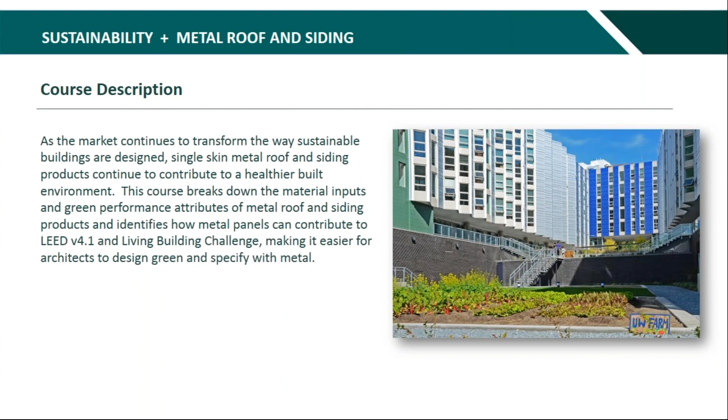So let's get started. The purpose of this course is to make life easier for architects to design green with metal roof and siding products. At the end of this course, you will have learned what makes metal panels green and how they contribute to green building certification programs.

We have 4 learning objectives. The first is material inputs and green performance attributes of metal roof and siding products. The second is understanding how metal products can contribute to LEED v4.1 for BDC projects. The third is understanding why and how transparency documents are valued under LEED 4.1. And the last is understanding how metal roof and siding products can contribute to the Living Building Challenge program.

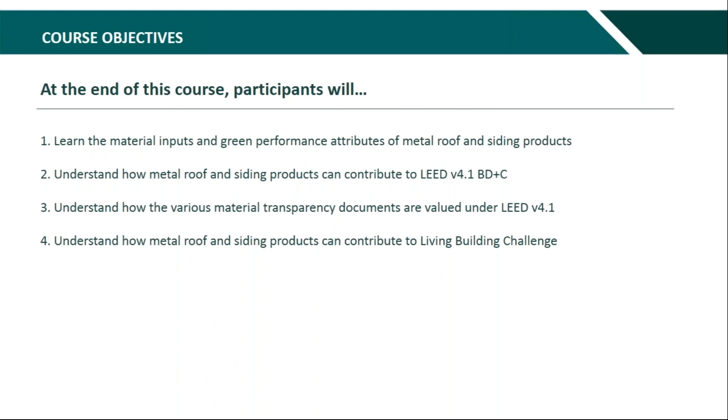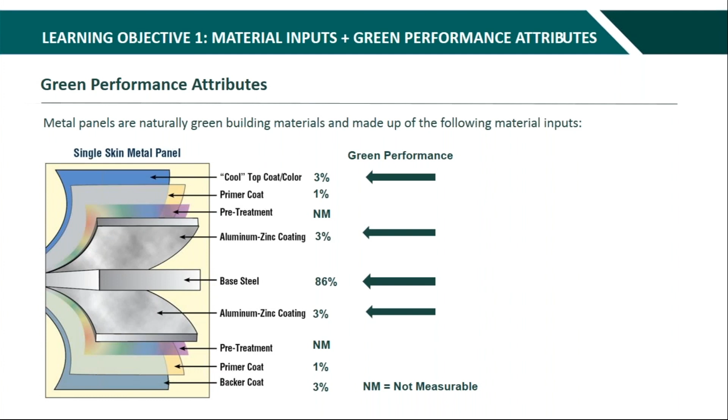Now, of all these materials, 3 ingredients deliver the green performance attributes metal panels are known for: the base steel, the aluminum zinc coating, and the cool top coat or color. Combined, these 3 materials represent about 95% of the total material used for metal panels, and those are the 3 materials I'm going to elaborate on.

So let's talk about the base steel and the aluminum zinc coating. What makes base steel green is that steel material has a long lifespan. It is 100% recyclable at the end of its life use, and it can be produced primarily by way of recycled steel. I'll elaborate more on that shortly.

The aluminum zinc coating offers outstanding corrosion protection, which helps contribute to the lifespan of metal panels. The Bethlehem International Engineering Corp did a real-world study a few years ago and found that the corrosion protection of aluminum zinc coating can span from up to 50 to 60 years. So when you combine the durability and longevity of steel material plus the corrosion protection of the aluminum zinc coating, those contribute to metal panels offering a lifespan of 40 to 70 years, and being 100% recyclable at the end of its life use.

This other benefit isn't attributed to the material, but metal panels are made to order, which minimizes waste on the job site. I'm mentioning that because that is a great green benefit.

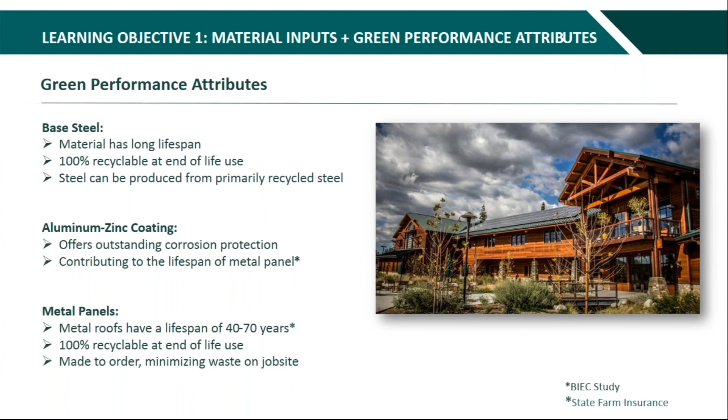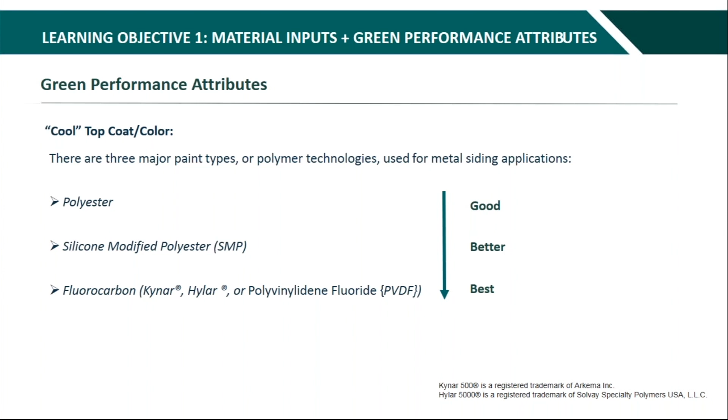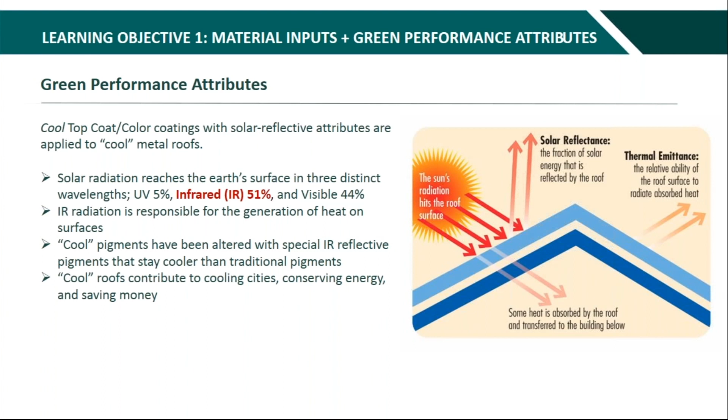Now, the paint systems that we use for cool metal roofs are also used for metal wall panels, which allows metal walls to offer the same solar reflectance and emittance performance as cool metal roofs. There has been recent research and discussion around creating a cool wall rating system, so I thought I would touch on that topic.

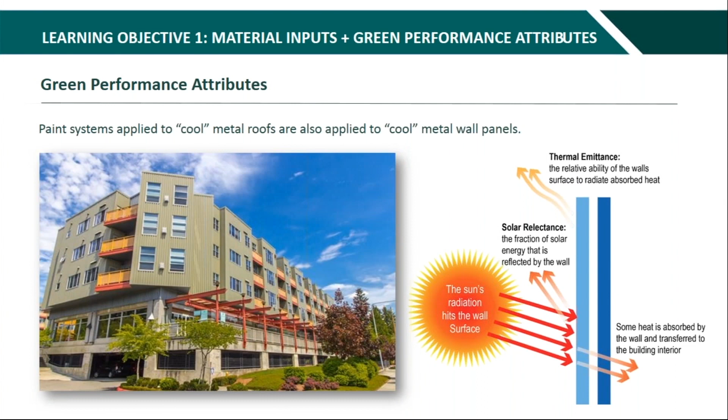The key takeaways from that research were that cool walls save energy, money, and carbon dioxide in warm climates. They help mitigate urban heat islands, and they tend to stay clean, and are available today, often at no extra cost.

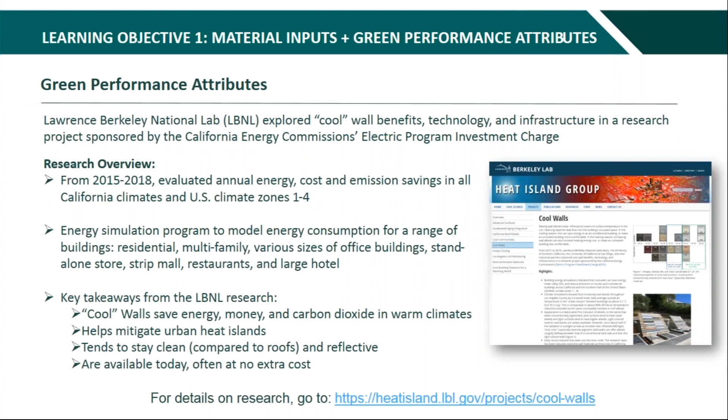The LBNL is developing cool wall measures in codes and standards and green building programs. They're working on establishing a cool wall product rating system that may be modeled on or expand on existing programs. We also know that the CRRC is proposing to create a rating program for exterior wall products, similar to their roofing program. So that's definitely an area that we are going to be monitoring.

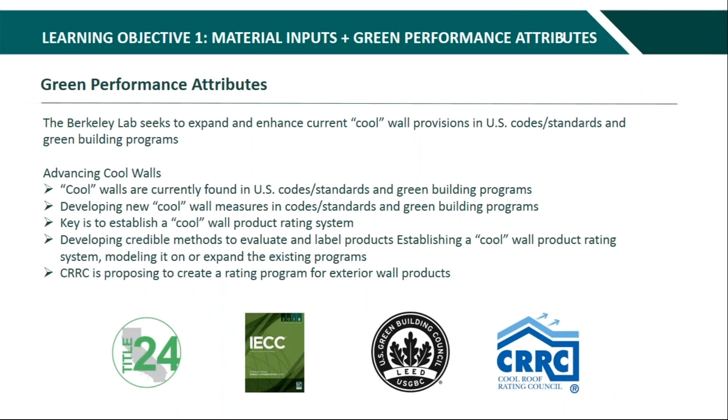So let's recap the key learnings for Objective 1. First, there are three main material inputs that deliver the green performance for metal panels: the base steel, the aluminum zinc coating, and the cool top coat or color.

We know it's the paint system used for metal panels that has cool pigments contributing to cool metal roofs. The paint systems used for cool metal roofs are also used for cool metal walls. We know that LBNL research has confirmed cool metal walls contribute to saving energy, reducing utility bills, and carbon dioxide in warm climates.

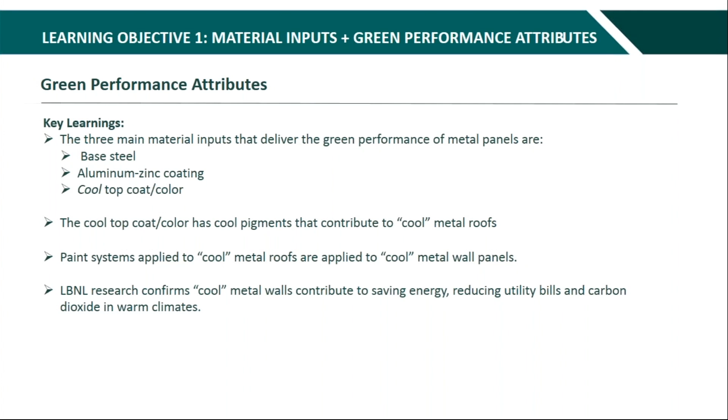The first poll question is: what material inputs contribute to metal roof and siding green performance attributes? We only have a little bit of time here because we got a lot of material and we want to keep pushing forward, so answer quickly. It looks like about a quarter of you have voted so far. Round up your voting now, and then we'll let Marie get to the final answer here. I'm closing it, last clicks.

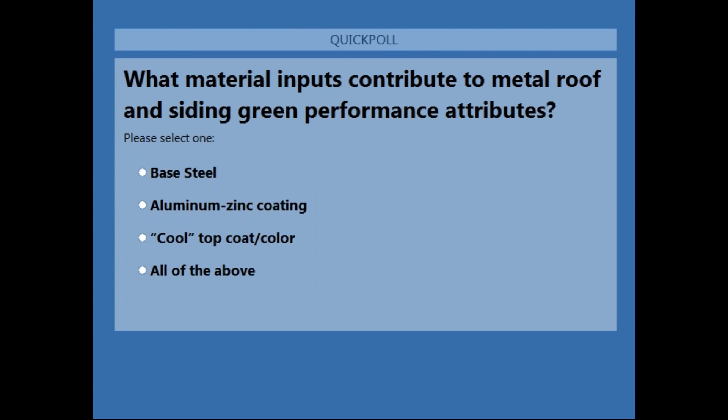Okay Marie, let us know how the audience did. I can tell you after you give the answer. So the spotlight question: what material inputs contribute to metal roof and siding green performance attributes? And the answer is all of the above. So Paul, how did the audience do? 77% of the audience got all of the above, 10% for cool top coat, 10% for base steel, and 3% for the aluminum zinc coating.

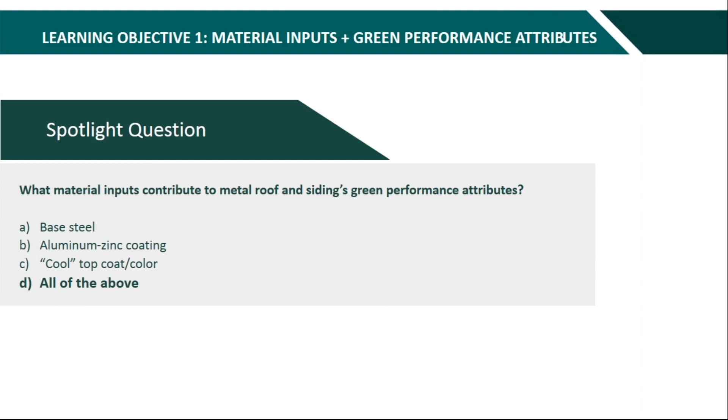Okay, excellent. So let's move on to the second learning objective, which focuses on how metal roof and siding products contribute to LEED 4.1 for B, D, and C projects. My focus is on USGBC's LEED rating system because it is the most recognized rating system, and I thought providing a LEED 4.1 assessment would be a good foundation for understanding how metal panels can contribute to other green building certification programs. There are a few of those other programs, but I thought this assessment would be a great foundation.

So here is a high-level snapshot of where metal panels can contribute points. I will cover each of these categories and point out the changes between LEED V4 and 4.1. But I want to make it clear that the actual point contribution would vary because it would depend on the type of project and design for the project.

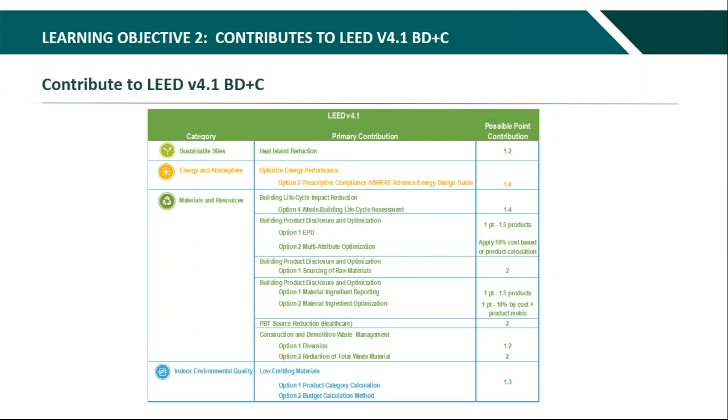So let's get started with the first category, sustainable sites, specifically heat island reduction. The intent of this credit is to minimize the effects on microclimates by reducing heat islands. We learned in the first learning objective that it's the paint systems that contribute to metal roofs contributing as a cool roof. Every color will be designated an SRI value, and if that color meets the minimum SRI value established in LEED, a point can be applied. What's important to note is that the CRRC provides 3-year SRI values based on generalized color families, and their approach is conservative and does not reflect the actual performance of each color.

The coating suppliers do not provide weather testing, so providing an actual 3-year aged SRI value for each color is not available. Coating suppliers are using CRRC's default values because it's an easier path. I'm sharing this with you because we received requests for 3-year aged SRI values, and we will provide the CRRC SRI values, but we also supply the initial SRI values because we feel that the initial SRI values reflect the true performance for each color.

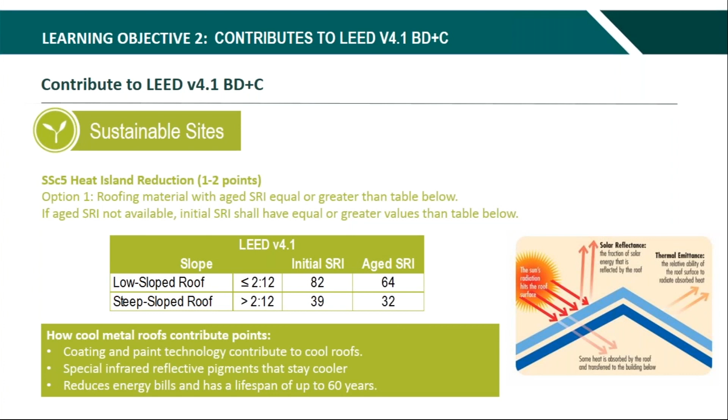This next category is energy and atmosphere, specifically optimized energy performance, and its option 2 is where metal panels can contribute points. The intent of this category is to increase levels of energy performance and reduce environmental and economic harm associated with excess energy use. Cool metal panels that meet the minimum SRI values can contribute or be included in energy simulation models, and cool metal roofs improve energy performance, but the percentage savings are based on several other factors, including the climate zone, the building geometry, and the HVAC system type.

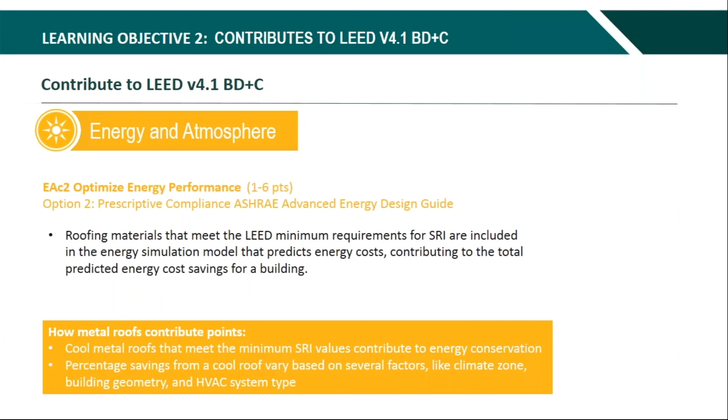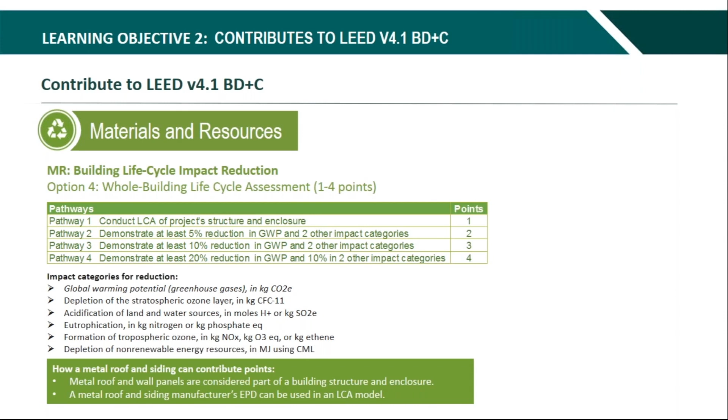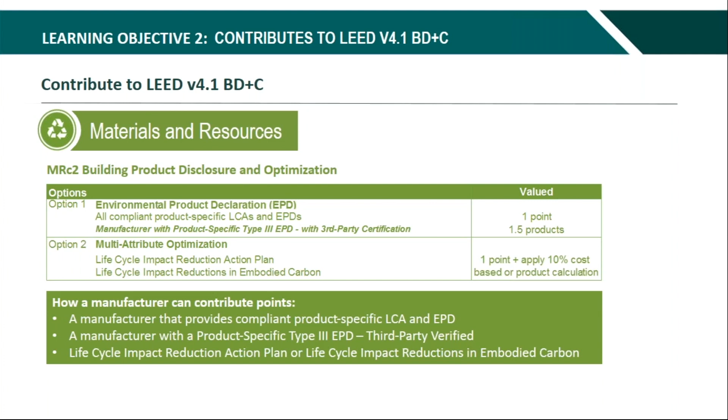Under V4, option 2 was leadership extraction practices. That is now option 1 under LEED 4.1, renamed to responsible sourcing of raw materials. I have that displayed in the table on this slide. But for metal panels, they fall under the recycled content option. Under LEED, there is a default recycled content for steel products where no recycled content information is available, and it can be assumed that the recycled content is 25%.

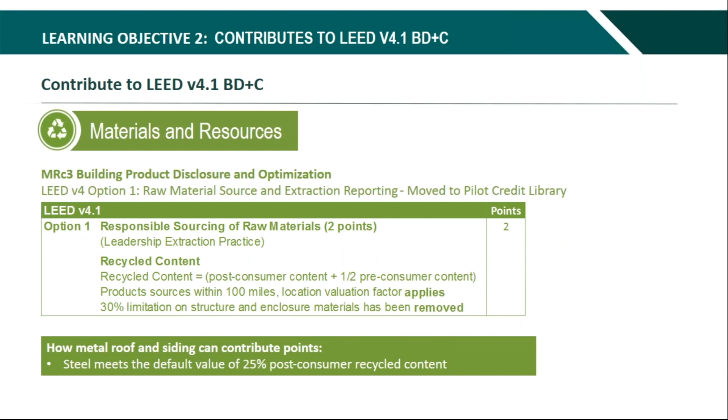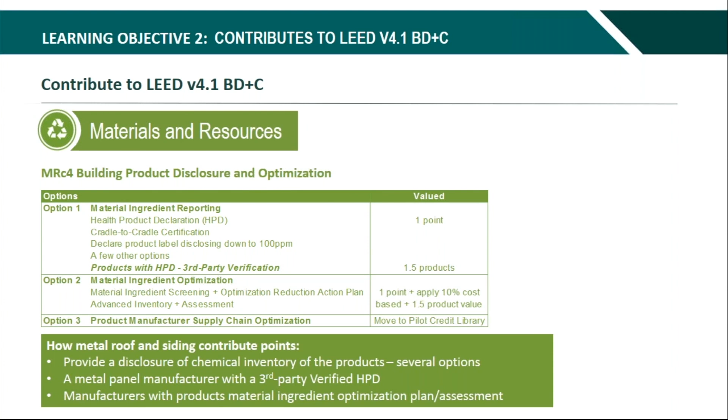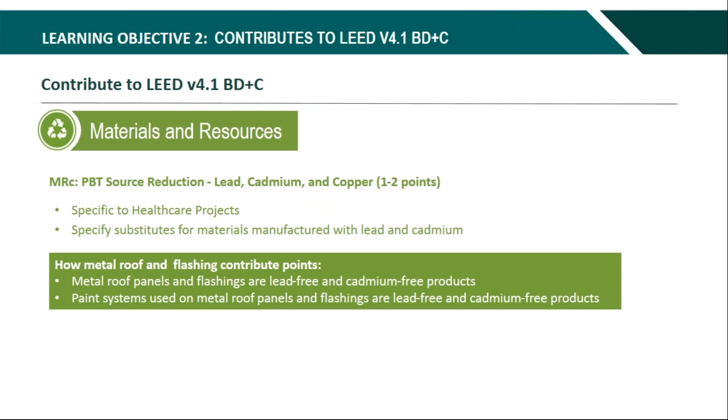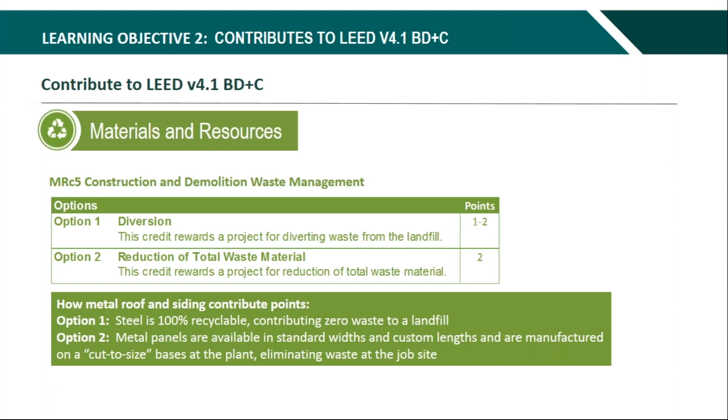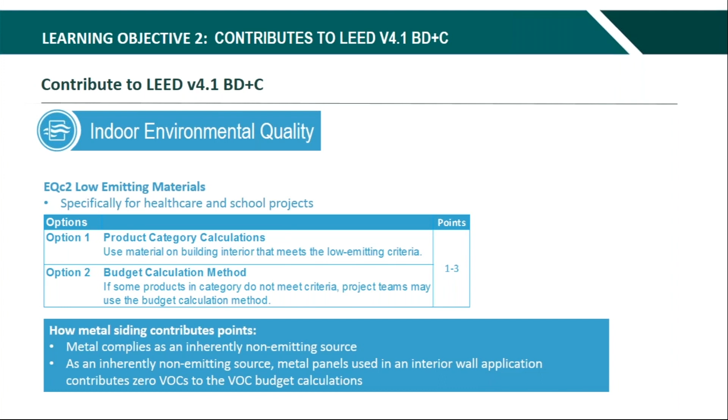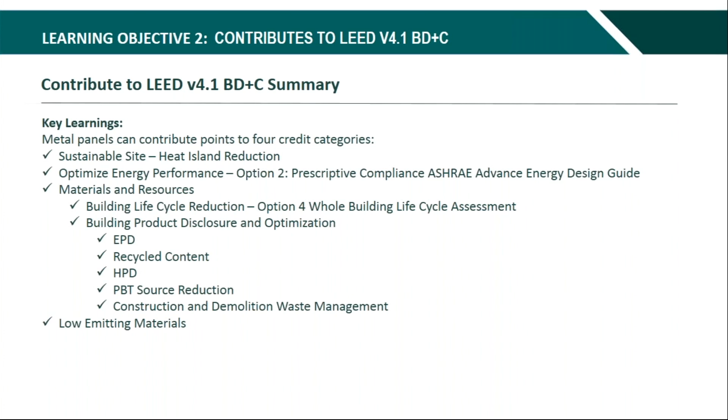And the answer would be C, materials and resources.

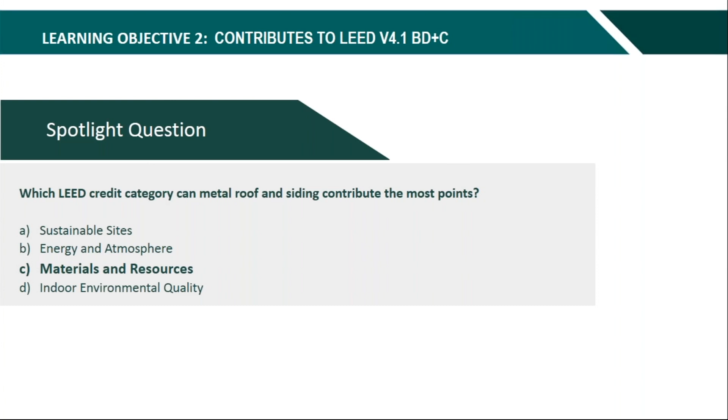Okay, perfect. So the third learning objective is around why and how transparency documents are valued. The two main transparency documents are the EPDs and the material ingredient reporting. The EPDs, of course, are derived from the LCAs, which determine the environmental impact of the manufacturing process from cradle to gate. The material ingredient reporting is done by way of HPD and some other disclosures, and of course the Declare label, and those disclose all the ingredients and known hazards in a product.

One thing I wanted to share quickly: in November I attended the USGBC Greenbuild Conference, and they shared a really important piece of information I wanted to share with you all, and that was the number of EPDs in North America has grown from 300 in 2014 to 1,500 as of November 2018. That's a huge increase. I was trying to look for similar data regarding HPDs but wasn't able to find that definitive data. But what I will say is that, if the growth of EPDs is any indication, building product manufacturers are listening to the design community.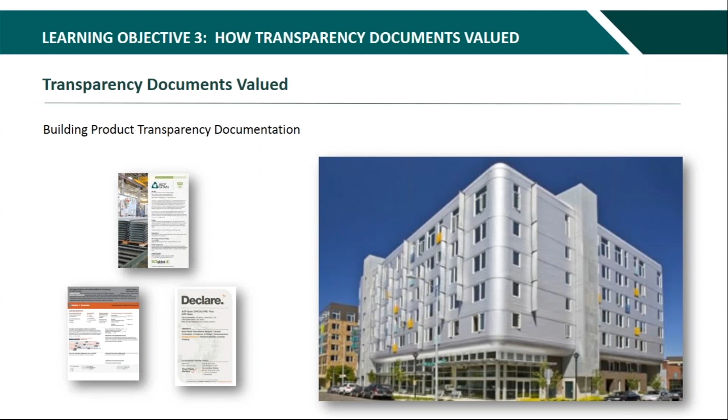So what I'm going to share with you now is regarding these transparency documents, specifically around metal panel products. Here's the EPDs, and I tried to make this simple: on the top part is version 4, on the bottom part is version 4.1. Let's start with version 4. Option 1, there were 3 pathways to contribute a point, and the product-specific Type 3 EPD could contribute the highest value, as you can see from the table on top. In option 2, there was a multi-attribute optimization, which was really intended to establish an industry average threshold for the impact areas.

Well, the change in V4.1 was meant to really simplify the selection of products with LCA data and increase the ability to select optimized products. So under option 1, if a manufacturer provides a compliant product-specific LCA EPD, they can contribute a point. Simple, right? There's not those 3 variations like there were under V4.

Now it's simple, 1 point. Now, if a manufacturer provides a product-specific Type 3 EPD with third-party verification and external critical review, they can contribute a point, and the product can be valued at 1.5 products.

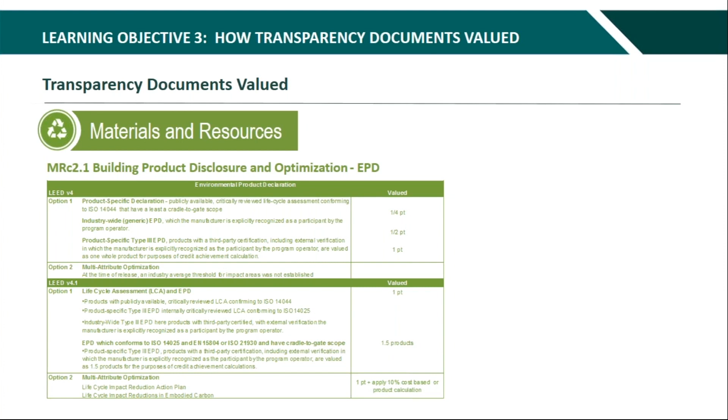So now in the case of metal product manufacturers, they would need to provide 2 different EPDs. Let me show you how this works. So depending on your project needs, on how a project is funded, determines which supply chain a metal product manufacturer would use to produce metal roof and siding products for your project.

And in general, standard steel materials used to manufacture metal panels that are located on the West Coast, so manufacturers on the West Coast, will be supplied by way of a basic oxygen furnace steel mill, and a metal product manufacturer would need to supply an EPD for that specific supply chain.

Now, if a project requires metal products with a higher recycled content, the steel material would come from an electric arc furnace steel mill, and an EPD would need to be provided by way of that supply chain. So that's an important distinction.

And so, of course, knowing that ahead of time at the beginning of a project is critical for that to be articulated to the metal product manufacturer, because they typically follow the standard steel supply chain, the BOF steel mill supply chain. So it's really critical to communicate that on the front end of a project.

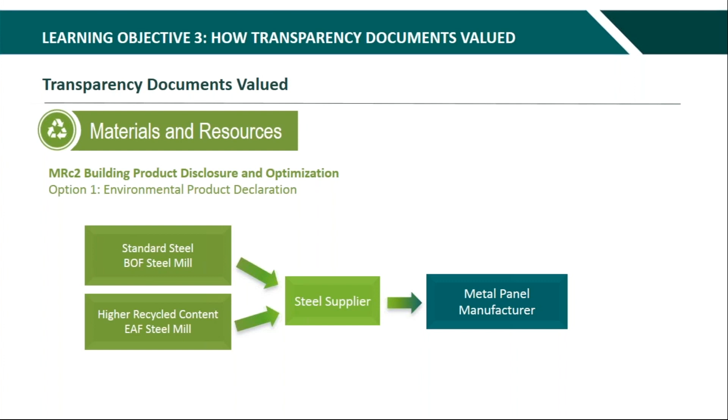So the second transparency disclosure that I mentioned is the material ingredient reporting. The changes to the material ingredient credit under LEED 4.1 were intended to reduce barriers for achievement while maintaining the overall approach to the material ingredient credit.

So as you can see from the table, LEED V4 option 1, there were several pathways to contribute a point. And then in option 2, there were several pathways to demonstrate material ingredient optimization. And in option 3, it was about supply chain optimization.

The changes from V4 to 4.1: in option 1, the pathways remain the same, plus they've added a third-party verification reward worth 1.5 products. So that is new. Option 2 was changed and rewards manufacturers who can demonstrate leadership for material ingredient screening, assessment, and optimization.

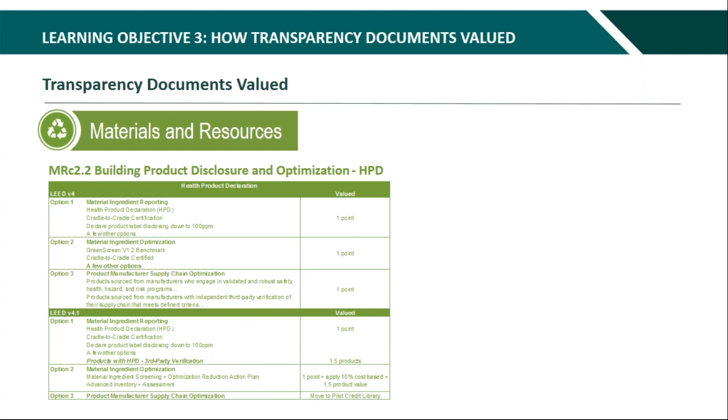And so 1 point can be contributed, applying a 10% of cost threshold and a 1.5 product value. And option 3 was moved to the pilot credit library. So I hope that shows it simple and visual. I'm a visual person, so I like to show that visually to simplify it.

Now, for a metal panel or metal product manufacturer, they would have to provide 2 different HPDs depending on the design needs of a project.

So a metal product manufacturer would need to provide a disclosure of its product in a painted offer, and the Residence Inn project is an example of that, and a disclosure for its product in an aluminum zinc coating with a clear top coating, and that would be the school project that I had shown on this slide.

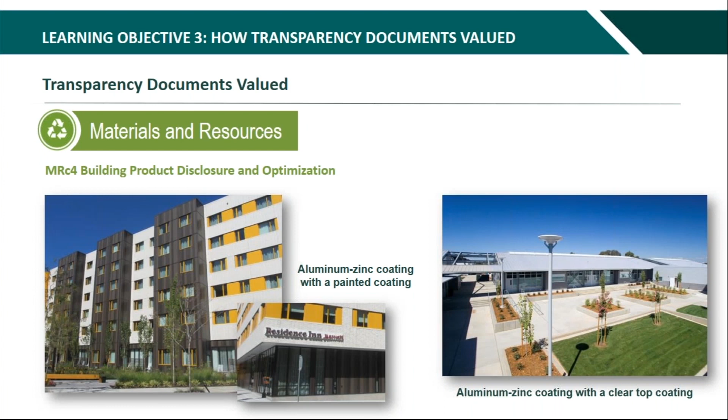As you can see, each coating, the different coatings, really support the different design aesthetics that an architect is trying to achieve. So that's an important distinction. So 2 different HPDs would need to be required.

Now, the third-party verified transparency disclosures remain an emphasis under LEED 4.1 and can contribute more to a project. Third-party verification offers many benefits, and I've included some of the benefits here, but I think the one that really stands out to me, I think they're all important, is that it provides assurance of compliance with standards. That to me is really important.

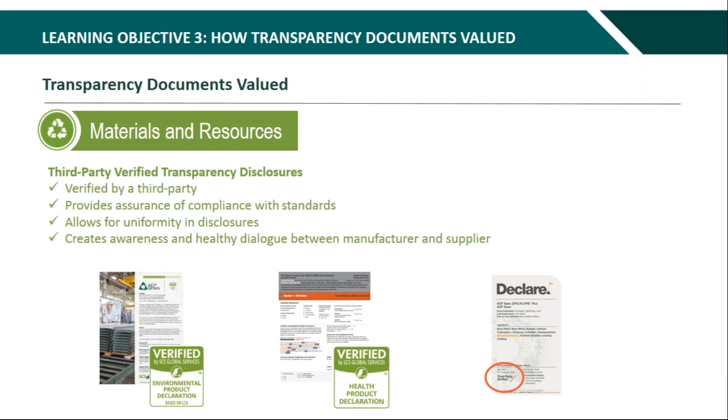But with that said, let's move on to the key learnings for Objective 4.

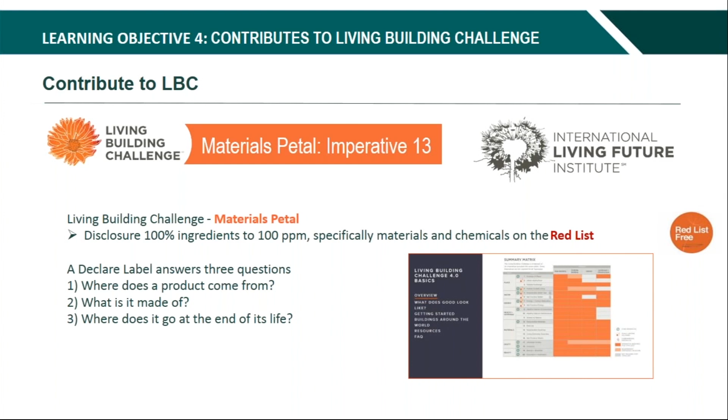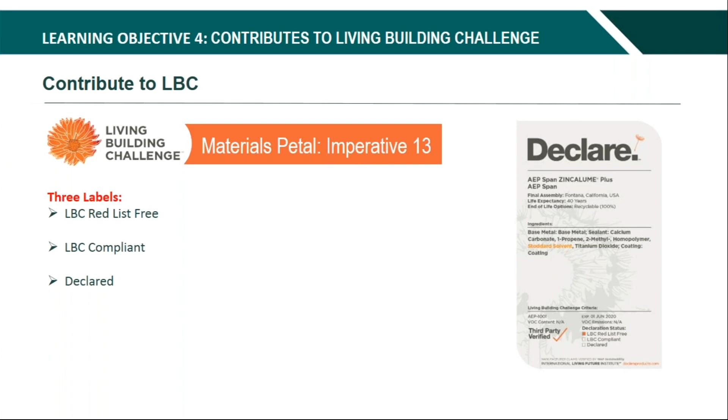So let's talk about the 3 labels. The first is the LBC Red List Free label, which discloses that there are no red list ingredients in a product. The LBC Compliant label discloses a product contains red list ingredients that have been given a temporary exemption by the LBC due to current market limitations. And the third label is Declared, which discloses a product contains red list ingredients not on the LBC exemption list.

So like HPDs, a metal panel manufacturer would have to provide 2 different separate disclosures: one for its products with an aluminum zinc coating, which is the school project shown on the slide, and one for its products in a painted offer. Today, metal wall panels can meet the LBC Red List Free criteria, but there are some challenges we're working through. Let me explain.

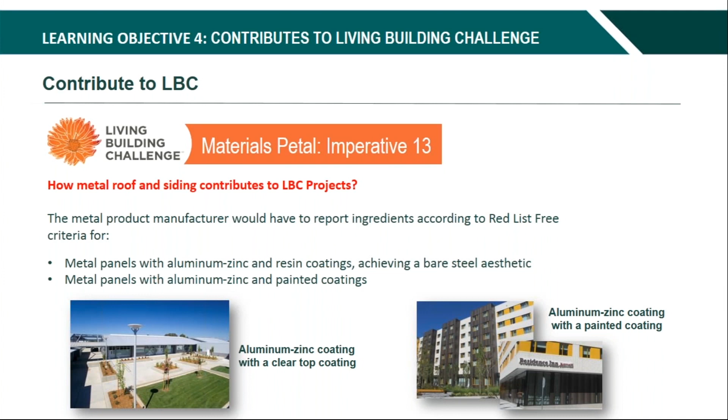So the metal panels with the aluminum zinc coating and the clear top coat meet the LBC Red List Free criteria. What's important to know is that these products can be ordered as a standard offer with no minimum requirements and at no extra cost. From a design perspective, it offers a natural steel aesthetic design, and it's offered in multiple profiles.

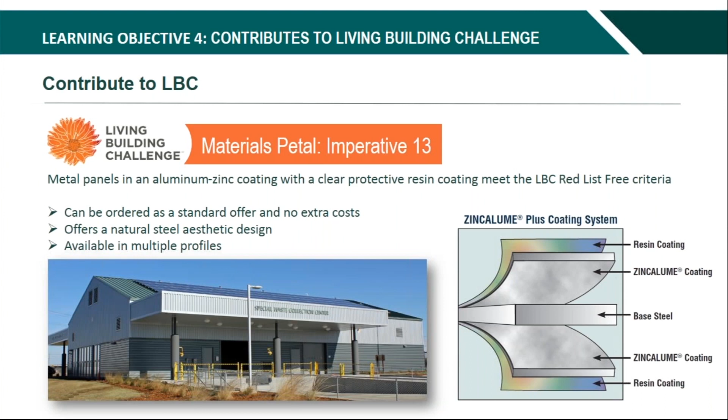I'm sharing this information first because when it gets to the painted offer, it's a bit more complex. Metal panels in a painted offer can meet the LBC Red List Free criteria, but it is typically a special order with minimum order requirements, offered at a higher price with longer lead times. So metal panel manufacturers are navigating some challenges with their paint offer, and I'll elaborate on that.

There is hesitation by coating manufacturers to provide proprietary information on paint formulas. And the standard corrosion resistant primers contain low levels of chrome.

Now, factory applied paints often contain a curing chemical that, while on the red list, is reacted and eliminated during the curing process. Despite the presence of a few red list substances, pre-painted metal is inherently safe and does not pose a risk. The industry has been working through this concern, and there have been some performance trade-offs, which until recently were significant. So there is progress, and we are actively pursuing a suitable replacement.

Because ideally, it would be great if we could offer our painted offer as a standard, with no minimum requirements and extra costs, right? So we're really trying to work through that solution, like our panels with the zinc aluminum coating and top resin coating being a standard offer. That's what we're shooting for with our painted offer. We're not giving up, and we're having these conversations with our paint supplier.

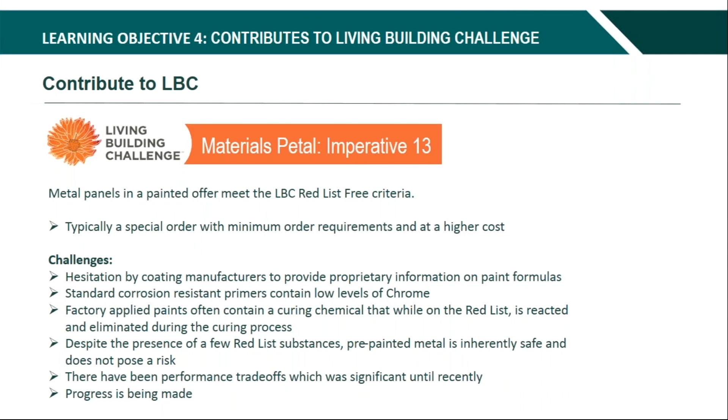Third-party verification is available for Declare labels, and that's relatively new. As with HPDs, third-party verification is huge and significant. It provides an additional level of confidence, mitigates risk, and provides assurances and compliance to the Declare label claims. It also creates awareness and healthy dialogue between the manufacturer and the supplier.

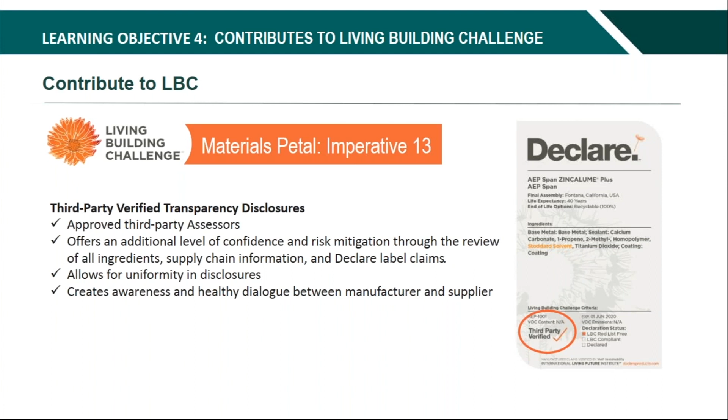So the key learnings for this objective: the Declare label answers three simple questions. Where does a product come from? What is it made of? And where does it go at the end of its life? Metal roof and siding can meet the LBC Red List Free criteria. Third-party verification is important, and providing assurances of compliance is, to me, the top benefit.

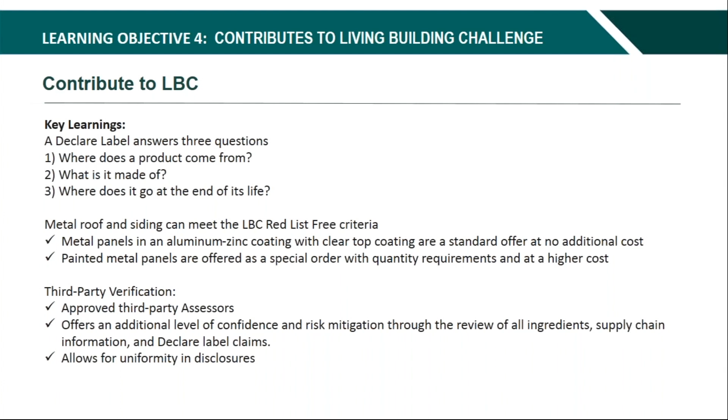So we're at our spotlight question. Which claims are true for metal panels with an LBC Red List Free label? A, painted metal panels require a special order with minimum quantity requirements at a higher price. B, metal panels with aluminum zinc coating with clear top coating are offered as standard at no additional cost. C, Declare labels can be third-party verified. Or D, all of the above.

I'll give you a quick second to determine which is the answer. And the answer is D, all of the above.

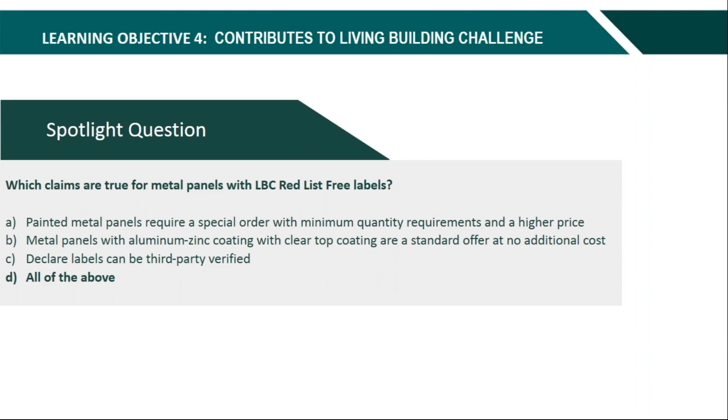Robert wants to know who are the third parties for LBC. That's a great question - third-party assessors for LBC. I know there are several; one of them is SCS Global and another is WAP Sustainability, but there are a few that are approved assessors. SCS Global is definitely one, and WAP Sustainability is another. I can find out that information for Robert if I get these questions, then I'm more than happy to respond to attendees and help answer those questions.